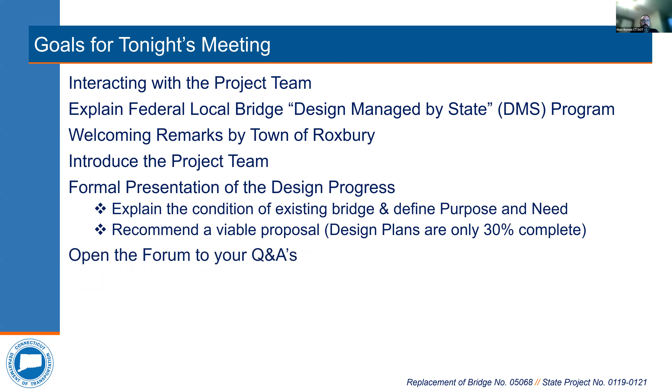Following the formal presentation, there'll be an open forum for your questions, and we will be able to answer to the best of our ability. Here's a quick overview on how to interact with the project team. You can send us an email at dot-flbp@ct.gov, by phone at 860-594-2020. Please keep in mind this is a monitored voicemail line, or in the Zoom Q&A, which will only be active during the live session. You can also email at any time during the comment period through April 10th.

Here's a quick slide on Title VI Civil Rights, which states that no person shall, on the basis of race, color, or national origin, be excluded from participation or subject to discrimination in the development of this project. We highly encourage you to visit and fill out the post-meeting survey located at the link below and QR code. And then there's a link to the department's Office of Equity regarding Title VI. A recording of this presentation will be posted to YouTube after the event, and closed captioning is also available on YouTube, which includes non-English translation option. Here's the department's policy notice to the public on Title VI.

The funding for the project is through the department's Federal Local Bridge Program under the Design Managed by State, or DMS program. Previously, in the traditional Federal Local Bridge Program, the projects were funded 80% with federal dollars, 20% with town dollars for design, rights-of-way, and construction, and the town would have to solicit their own design firm. Under the DMS project, design, rights-of-way, and construction phases are funded with a minimum of 80% federal dollars and a maximum of 20% state dollars. Design, rights-of-way, and construction is at zero cost to the town. The department also utilizes our task-based designers and our consultant liaisons for the design process. While the department is taking over the design process, it is still a full partnership with coordination with the town.

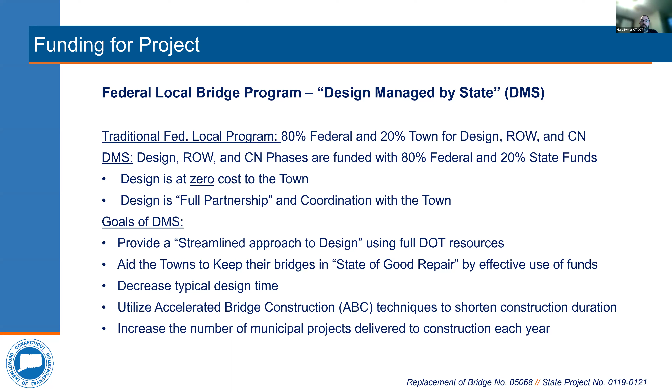The goals of the DMS process are to create a streamlined approach to design using full DOT resources to aid the towns to keep their bridges in a state of good repair by effective use of funds, to decrease our typical design time from roughly 60 months to 36 to 48 months, to utilize accelerated bridge construction, or ABC techniques, to shorten construction durations, and to increase the number of municipal projects delivered to construction each year. I'll now turn it over to Patrick Roy, First Selectman, Town of Roxbury.

Patrick? Good evening, everyone. First of all, I'd like to thank everyone who's joined this, whether you're watching this as a recording or live tonight. And I'd also like to thank the Connecticut DOT and Close, Jensen, and Miller; this whole project so far has been very streamlined and with a lot of transparency. So I think it's important that tonight we take that time to answer any questions that we have. Like they said, it's open till April 10th. And really, honestly, just listening to some of the concerns of our town, we have a very unique town. Some of our concerns were with traffic flow, which they're addressing, the appearance of the finished product, as well as environmental concerns. So I just want to thank everybody for their interest in this and thank everyone who put this together. Great. Thank you, Patrick.

I'll now introduce the project team from the Department of Transportation. Our division chief is Bart Sweeney, who's the manager of the bridge unit. Also is Derek Lassard, principal engineer of the consultant liaison engineering unit. Myself, Marc Byrnes, project manager. Andrew Shields, project engineer. From the department's Office of Rights of Way is Zach Garino, the right-of-way coordinator. And then from Close Jensen & Miller, who's the department's consultant liaison engineer, is Jim Platosh, project manager, and Jim Otis, project engineer.

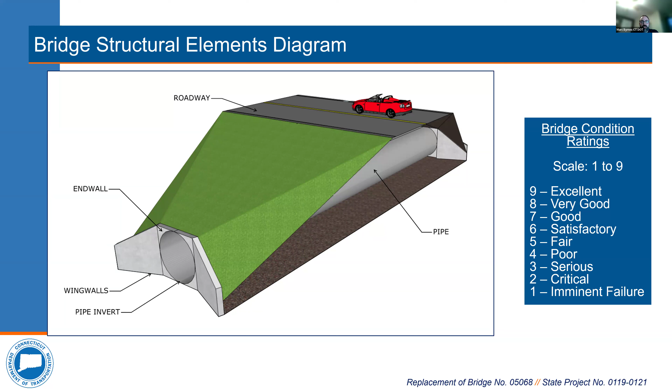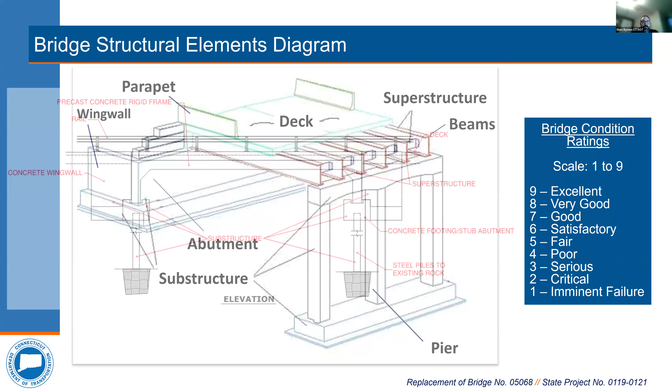Here's another slide highlighting some key bridge structural elements. This is a precast concrete rigid frame, which has several of the other elements, while also displaying steel piles, which will also carry the loads of the bridge into the ground and prevent scouring out the substructure of the bridge.

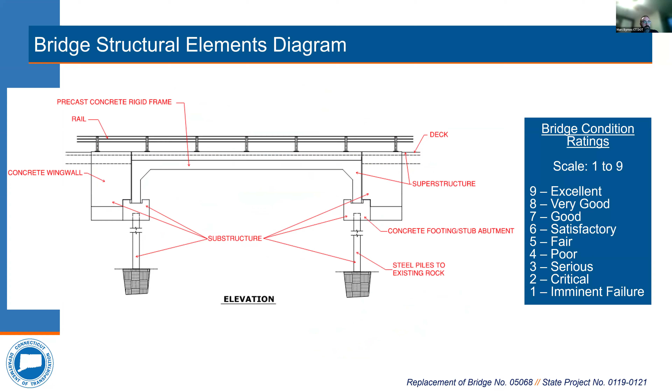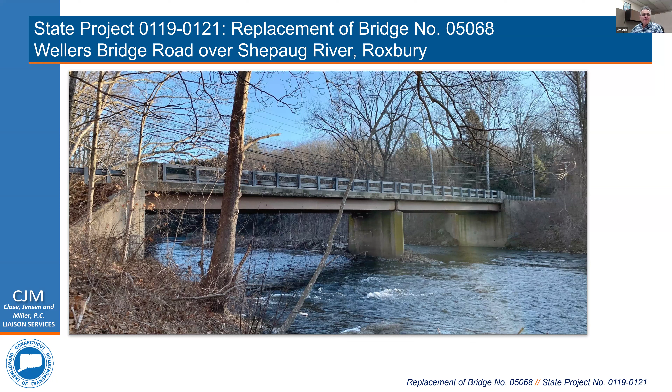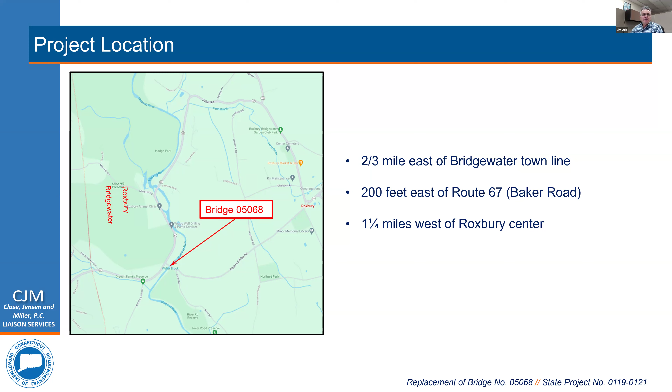Bridge 5068 carries Wellers Bridge Road over the Shepaug River. It's located about 1.25 miles west of the center of Roxbury and 2/3 of a mile east of the Bridgewater town line. And it's also about 200 feet east of Baker Road, which is Route 67. The land around the bridge is zoned residential.

Wellers Bridge Road is classified as a rural minor collector with an estimated average daily traffic flow of 3,000 vehicles per day in 2023. The approach roadway has a posted speed limit of 30 miles per hour, and the 24-foot wide approach roadway width provides 2 lanes of traffic, 1 in each direction.

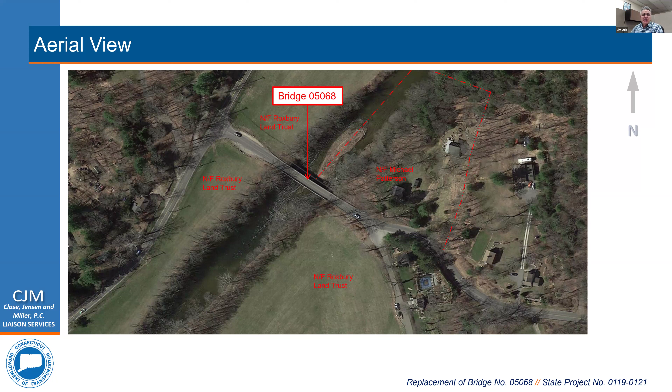The existing 2-span bridge was built in 1956 and rehabilitated in 2001. It's a steel multi-girder superstructure with composite concrete deck supported on 2 concrete abutments, 1 at each end of the bridge. And you can see 1 concrete center support pier near the middle of the bridge in the river.

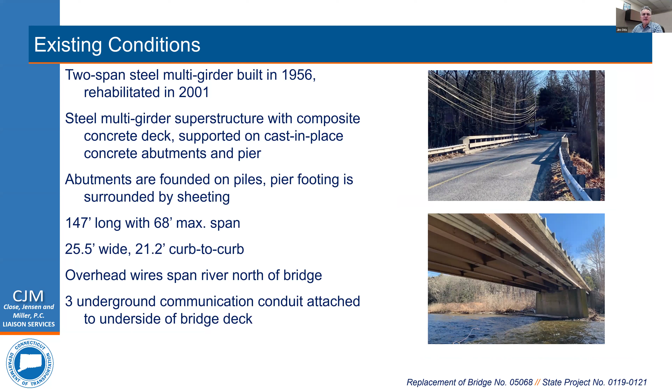The abutments are founded on piles driven to rock, but the center pier is on a spread footing, which is surrounded by sheeting. The overall structure length is about 147 feet, with a maximum span of 68 feet. The overall structure width is 25.5 feet, but the curb-to-curb width on the bridge is only 21.2 feet.

There are overhead utility wires that span the river on the north side of the structure, which you can see in the top photo, and there are fiber optic communication conduits under the deck, which are the 3 white pipes that you see in the bottom photo.

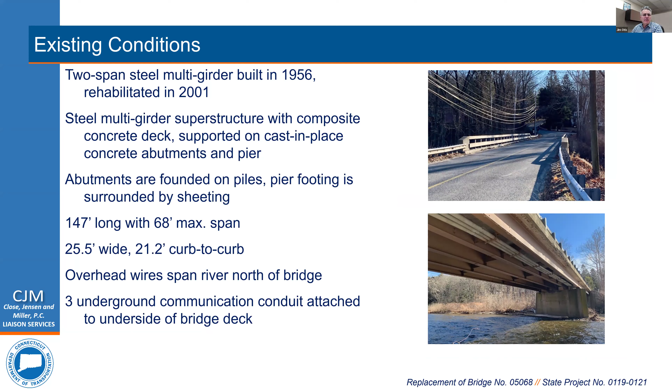The deck condition on the existing bridge is rated as poor, and the 21.2-foot curb-to-curb width is considered too narrow for the current traffic volume that's here today. There are cracks in the pavement, and the concrete deck under span 1 has some scaling, punky concrete, and some 3-inch deep spalls with exposed rebar.

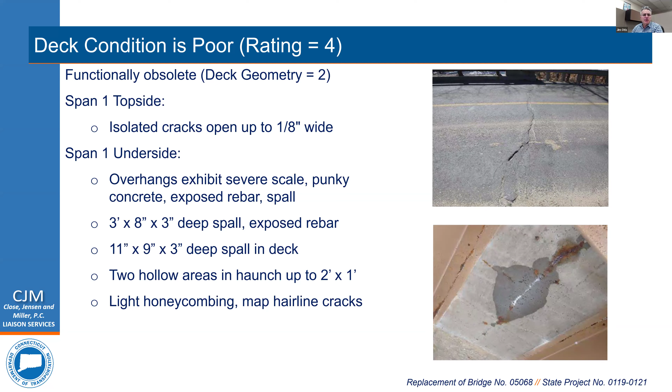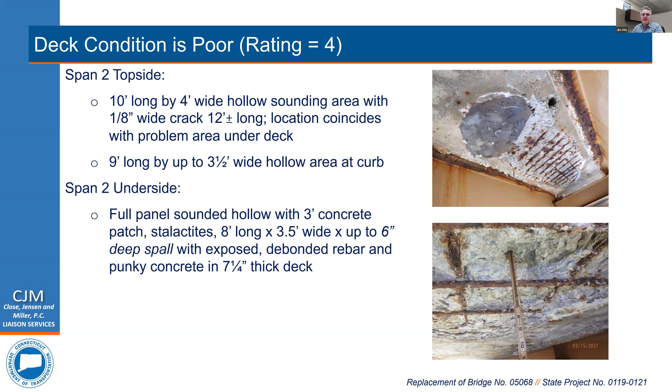Deck conditions under span 2, shown in these photos, include a 3-foot diameter concrete patch, an 8-foot long by 3.5-foot wide by 6-inch deep spall with exposed and debonded reinforcing bar and punky concrete. And there's also some severe scale, active leakage, and hollow concrete areas under span 2.

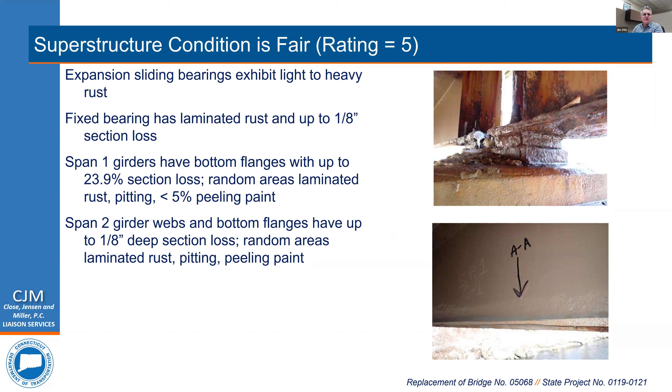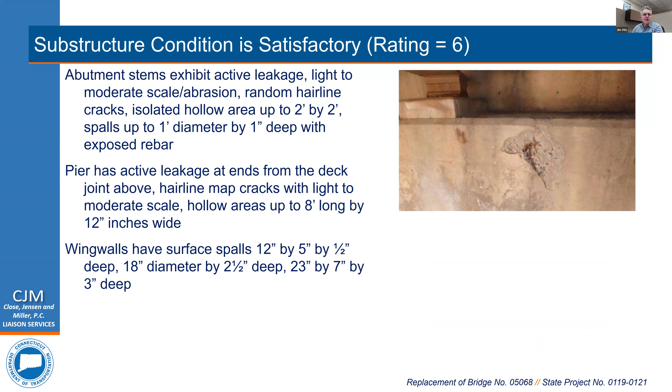The steel superstructure is in fair condition. Some components exhibit light, heavy, and laminated rust, and some of the steel girders have section loss due to corrosion. The substructure is currently in satisfactory condition, but does have some active leakage at the 2 abutments and center pier. There are concrete spalls up to 3 inches deep and some isolated hollow concrete areas.

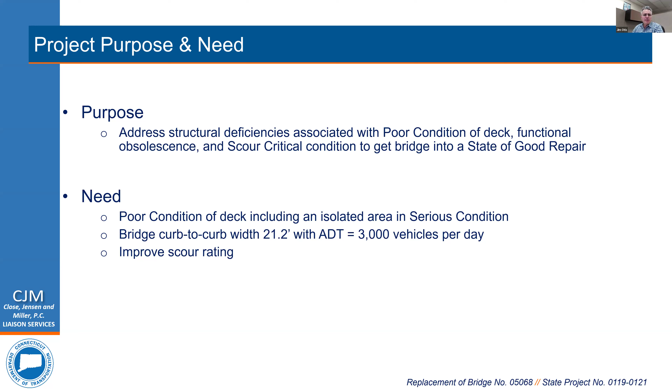And so the purpose of this project is to address the structural deficiencies that I just discussed associated with the poor deck condition, the narrow deck width, in order to get this bridge into a state of good repair. It's recommended that this 68-year-old bridge be replaced in order to achieve that purpose. A rehabilitation of the existing bridge is not an option given its poor condition. So Close, Jensen, and Miller and the Connecticut Department of Transportation looked at 3 replacement alternatives.

The selected alternative shown here will provide a clear span of 160 feet and eliminate the need for a center pier. A 160-foot span meets or exceeds 1.2 times the measured bank full width of the Shepaug River at this location and accommodates 2 riparian or wildlife crossings under the bridge, 1 at each bank of the river, which I'm pointing to with the laser pointer here and here. That would actually allow wildlife to cross from one side of the river to the other.

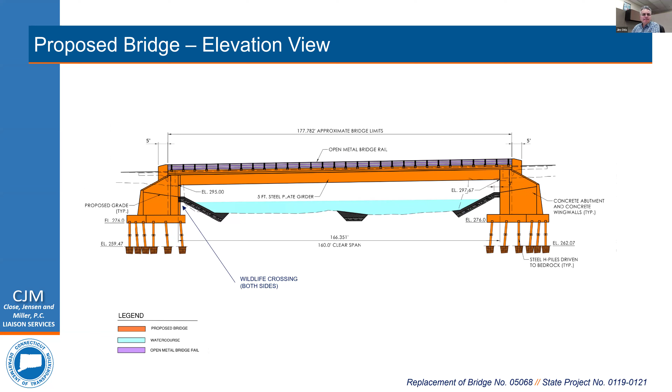The new bridge will be founded on conventional footings on top of piles, given the flow characteristics of the river during major storm events. The elimination of the center pier will also prevent future scour and sedimentation in the river, sedimentation being the accumulation of excess sediment. And this type of structure, a single span, will have a smaller permanent environmental impact on the watercourse than a replacement bridge with a new center pier would have.

The Connecticut Department of Energy and Environmental Protection reviewed the project and indicated that the Shepaug River supports a diverse community of 13 different kinds of fish. And the DEEP noted that about 750 trout are stocked in this river annually.

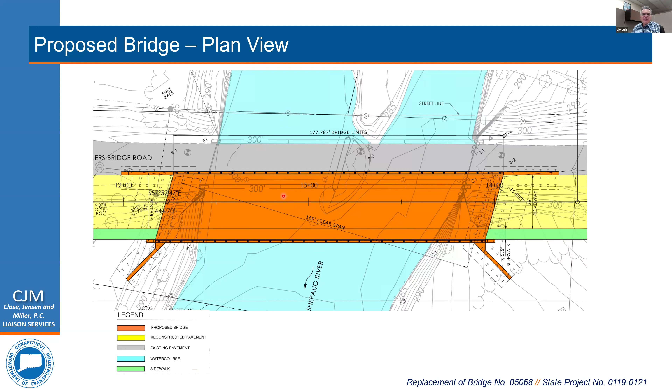As you can see from this graphic, the center line of the proposed replacement bridge, and the replacement bridge is shown in orange, would be located south of the existing bridge, so that most of the new bridge would be built alongside the existing bridge. You can see a portion of the existing bridge, it's in gray, and it's located between this number 300 and that number 300. That's where the existing bridge is. The new bridge will be built slightly to the south of that for reasons I'll explain in a few minutes.

I mentioned overhead utilities on the north side of the existing bridge, which can remain in place while the proposed bridge is being constructed. This graphic shows the proposed bridge and road improvements in orange and yellow. Underground fiber optic communication lines that are currently located in the roadway and under the existing bridge deck would need to be relocated during the project. And temporary construction easements will be required for construction access, grading, water handling, and sedimentation control upstream of the existing bridge to the north.

The new bridge will have a curb-to-curb width of 28 feet, which will accommodate 2 lanes of vehicular traffic, 1 in each direction. And the traffic direction is designated by the green arrows. The one pointing up is eastbound towards the center of Roxbury, and the one on the left pointing down is westbound traffic. The bridge will have an open metal bridge rail mounted to a cast-in-place concrete curb, and a 5-foot 6-inch wide or 5.5-foot wide sidewalk on the south side of the bridge.

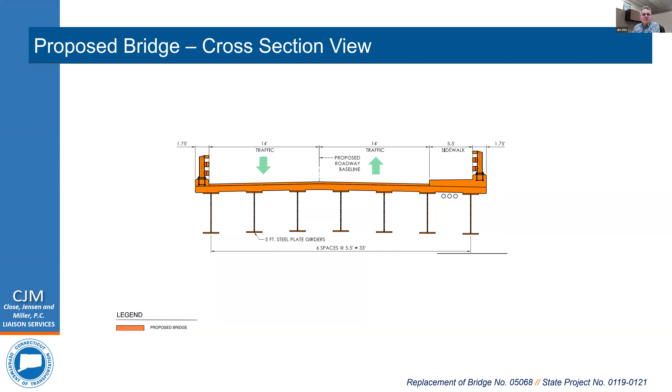The superstructure will be comprised of 5-foot deep steel girders with an 8.5-inch thick cast-in-place concrete deck, topped with membrane waterproofing and 3-inch hot mix asphalt wearing course. Now, although there is no sidewalk on the existing bridge, we are providing one on the replacement bridge, as I just showed you. Because of this bridge's overall length, the average daily traffic flow, which is, as I mentioned, 3,000 vehicles per day, based on the department's 2023 estimate.

The sidewalks that I spoke about earlier, which will connect to the Roxbury Land Trust's future multi-use trail, are shown in green on this graphic. A possible land swap is being discussed with the town of Roxbury and the Roxbury Land Trust on the south side of the proposed bridge, which will facilitate construction access for the replacement work. The land swap areas are designated by the orange and purple triangles.

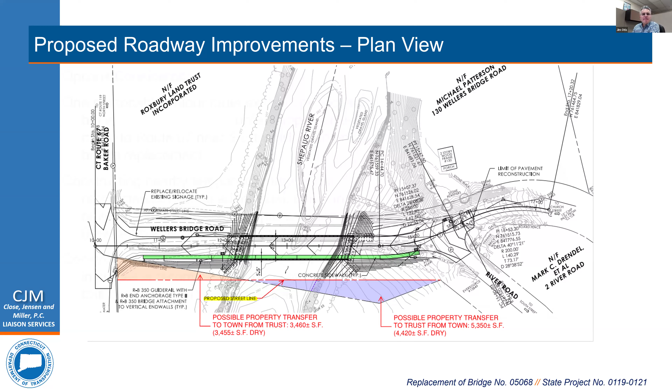We also looked at an option where we considered constructing a temporary two-lane bridge crossing over the Shepaug River to avoid detouring traffic. However, this second option was discounted because of the costs, the environmental impact, and the longer construction duration associated with building two bridges, one temporary and one permanent. If we built a temporary bridge, it would need to be assembled and put into operation before bridge work could begin to demolish the existing bridge, and then that temporary bridge would have to be disassembled afterward, which could add months to the overall construction duration.

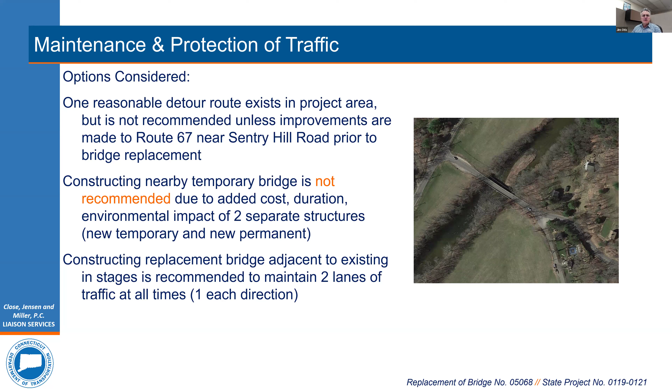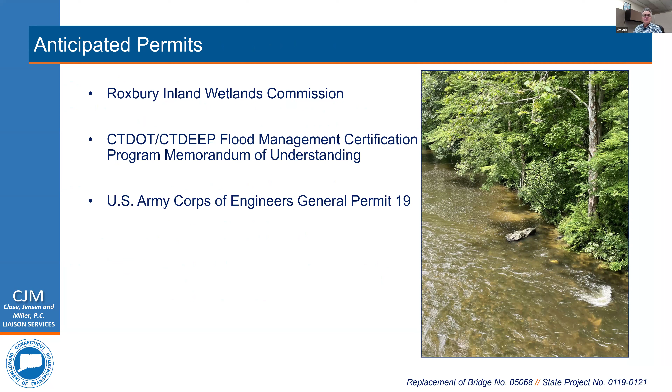These are the local, state, and federal permit approvals anticipated for the project from the town of Roxbury, the Connecticut Department of Energy and Environmental Protection, and the United States Army Corps of Engineers. Town residents will have an opportunity to hear details about the project again at a future Roxbury Inland Wetlands Commission public meeting if they want to.

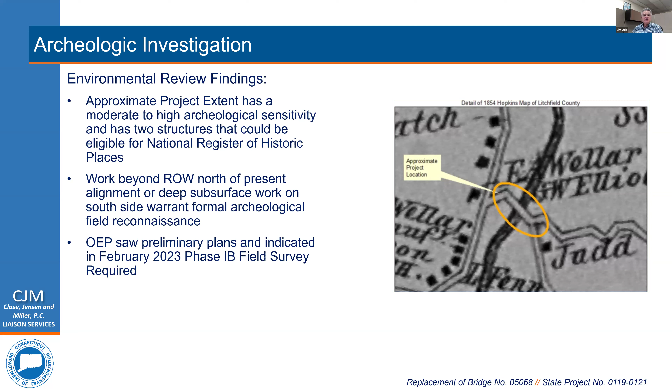The DOT performed an environmental review of this site and determined the approximate project location has a moderate to high archaeological sensitivity, and suggested that any work beyond the existing right-of-way to the north of the present alignment, or deep subsurface work on the south side, warrants a formal archaeological field reconnaissance. Because the recommended bridge replacement will likely involve these types of activities, we are in the process of obtaining proposals from qualified archaeological firms to perform an archaeological investigation in the project area this summer.

Construction is anticipated to begin in the spring of 2026, depending on the availability of funding, acquisition of rights-of-way, and pending approval by local, state, and federal regulatory agencies. The bridge work is anticipated to take 14 to 16 months to complete.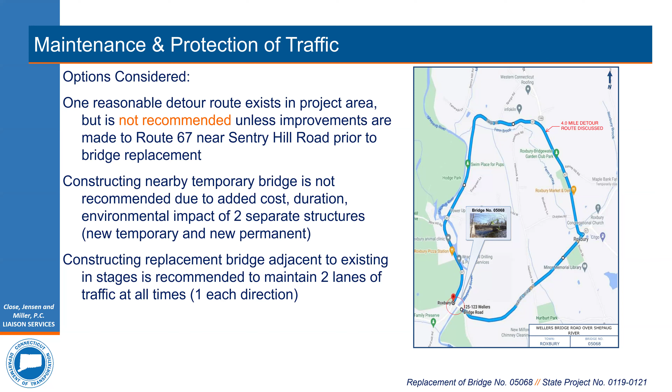Yes, I can talk about the detour that we considered. I'm going to put a different slide up here. Initially, we considered a detour, a 4-mile detour around the project area. However, based on input from the local traffic authority and input from the department, we decided that rather than do a detour, we were going to stage the work as shown in this slide.

So in essence, there will be no detour. Detours will be avoided or minimized to the greatest extent possible by constructing the proposed bridge immediately adjacent and slightly south of the existing bridge.

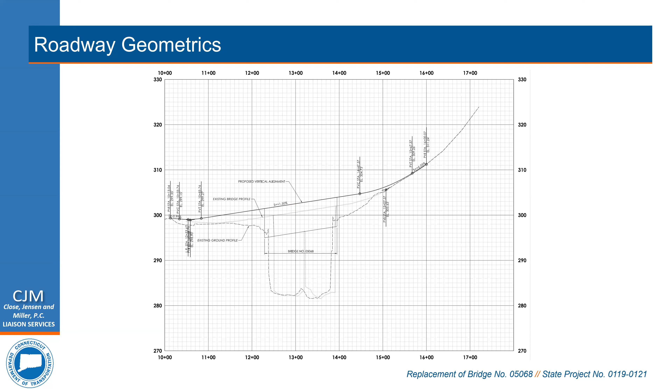Thank you, Jim. Would you be able to remind everyone what this project is going to cost and when the road is actually going to be under construction?

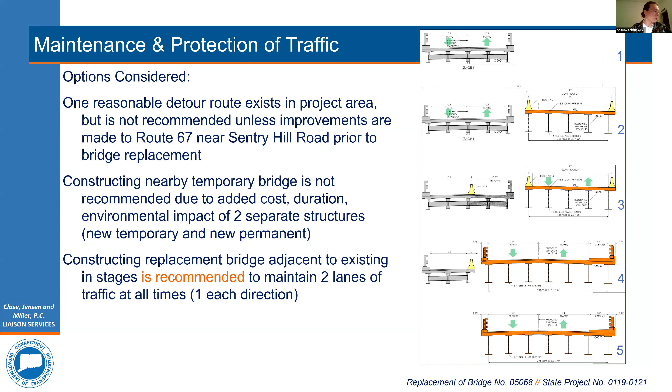Sure. The project is anticipated to begin actual construction in the spring of 2026. The Department of Transportation will probably advertise the project for contractors in the summer of 2025. Between August of 2025 and April of 2026, the bids will be evaluated and the contracts will be formed, prepared, and executed. During the winter months, the Department of Transportation doesn't typically do work, between November 30th and April 1st. So we anticipate work starting at the beginning of 2026, not the end of 2025.

Perfect. Thank you very much, Jim. We have one other question that came in. Where will equipment for the project be placed during the construction time, specifically during non-working hours?

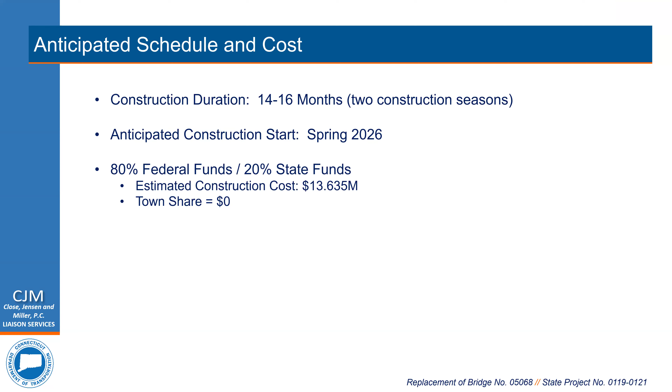And Jim, how is the river going to be protected when they're staging all this material on the sides of the river? Good question. The contractor will be required to utilize best management practices, including hay bale, silt fence, temporary seeding, temporary sedimentation basins. Those features aren't shown on this slide, but the details for that would be included in the local inland wetlands permit application that will be prepared and submitted.

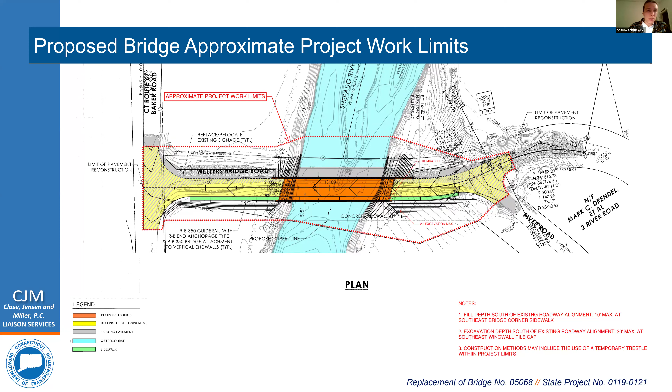We have one question, or one comment, that came in. The attendee understands the concerns about diverting traffic to Route 67. It's important to note for the record that the state of Connecticut has done little to remedy the issues currently existing at the Sentry Hill Road and Route 67 area. These concerns have been in existence for many years. For the state to agree with our first selectman, Patrick Roy, that the current roadway is unsafe for the anticipated traffic volume speaks to the need for the state to take ownership of the Route 67 route and to make improvements.

So unfortunately, during this project, the scope is actually strictly just on the bridge itself, and we don't have the financial ability to address the detour concerns as well as the bridge itself. But we chose the safest route possible that was available in the area, the one least impactful to the project. Luckily, with Jim Otis's presentation, he was able to explain that there was going to be staged construction, which increased both the time and cost of the project, just to make sure that if the road was ever shut down, it would be for a very short period of time, and it would be extremely limited the time we would actually have to be diverting traffic around the project site to the Sentry Hill and Route 67 area, to try and limit that issue.

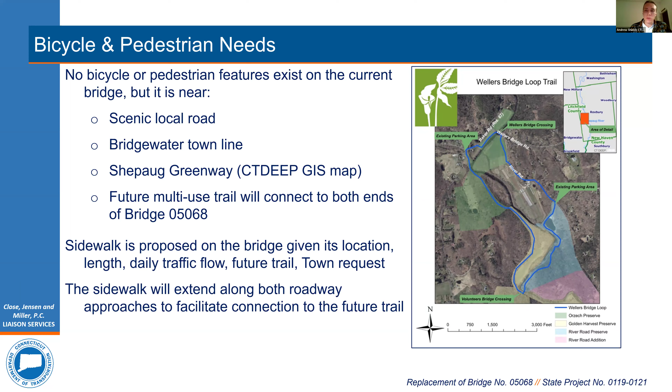Great, thank you, Jim. So at this time, again, this is an open Q&A for the entire project. Any questions or concerns you may have, you're welcome to voice them here. If we can't answer them here, we could absolutely follow up with you very soon, because again, this project is to better the infrastructure of the state of Connecticut. So anything we could do to help, we are more than willing to do so.

So Jim, we got another question in. Will there be plantings and trees replaced along the riverbank and construction areas when the project has been completed?

We have not proposed landscaping in these very conceptual plans. However, as this project moves forward into design and as we go through the local, state and federal permitting process, there will be an opportunity to supplement this plan with plantings if deemed appropriate, either by those regulatory agencies or during the local permitting process. So I think certainly there's an opportunity to do some landscaping within the right of way along the road, if that's something the town is interested in pursuing.